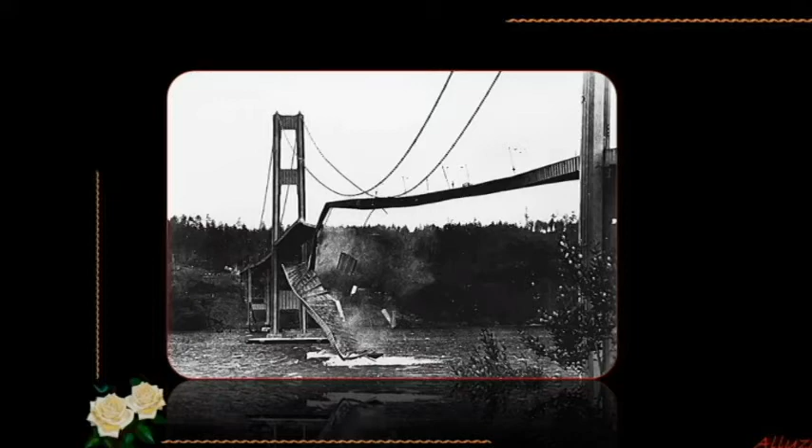Reasons for structures to collapse are bad design, faulty construction, foundation failure, extraordinary loads, unexpected failure modes, or a combination of causes. But failures also occur due to natural disasters such as earthquakes, floods, hurricanes, cyclones, and fires.

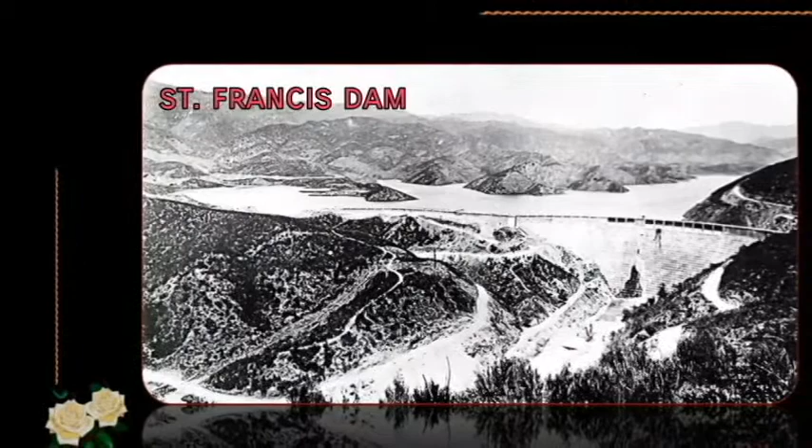The St. Francis Dam was a curved concrete gravity dam, built to create a large regulating and storage reservoir for the city of Los Angeles in California. The reservoir was an integral part of the city's Los Angeles Aqueduct water supply infrastructure. It was located in San Francisquito Canyon of the Sierra Pelona Mountains.

At 11:57 p.m. on March 12, 1928, the dam catastrophically failed, and the resulting flood killed at least 431 people. The collapse of the St. Francis Dam is considered to be one of the worst American civil engineering disasters of the 20th century, and remains the second greatest loss of life in California's history.

An investigation into the disaster concluded that it had been caused primarily by the unsuitability of the San Francisquito rock for supporting a dam and a reservoir.

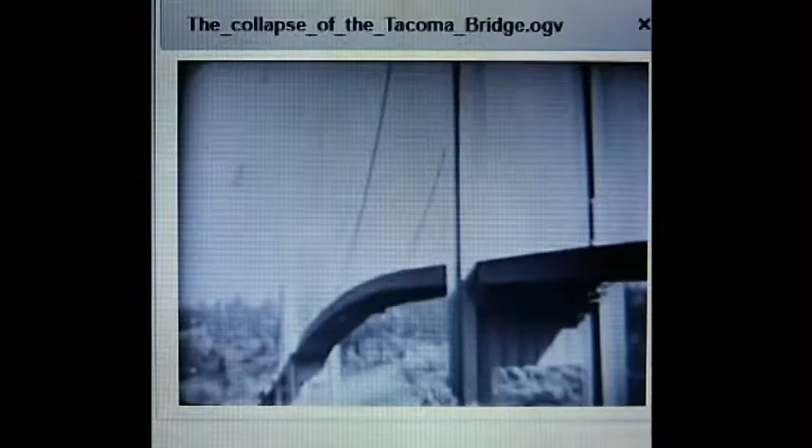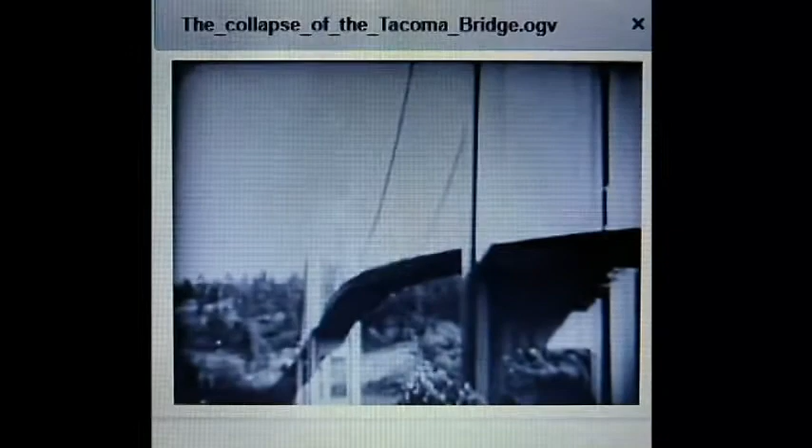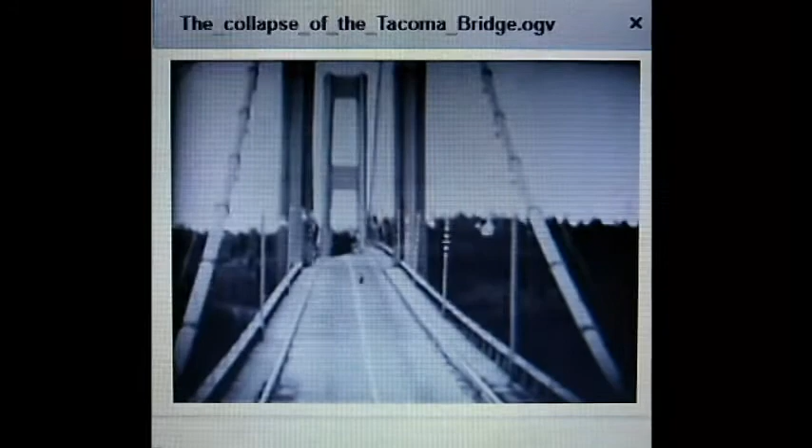The Tacoma Narrows Bridge in Washington collapsed only 4 months after opening for public use. The bridge spanned the nearly mile-wide Puget Sound, making it the third longest suspension bridge in the world, next to the Golden Gate Bridge and the George Washington Bridge.

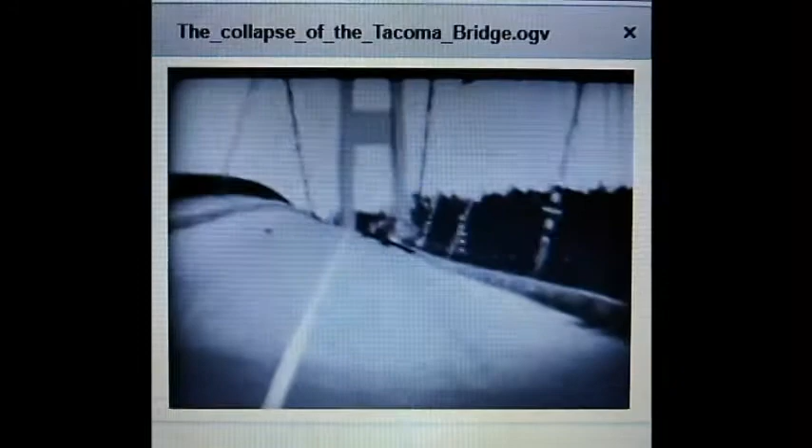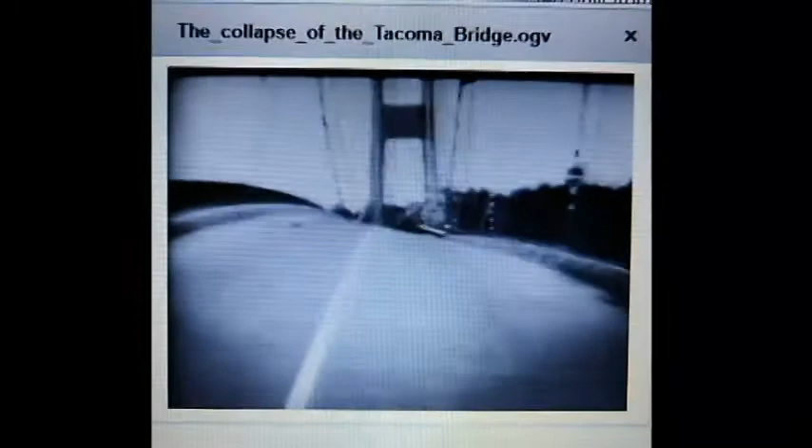While the original designer intended to create greater stability with a more standard design, the cost was unreasonably high. Instead, a cheaper option using plate girders gained approval. The girders, though, were only 1/3 the height of the originally proposed trusses, which resulted in a disproportionate depth-to-width ratio. As a result, the bridge was extremely flexible and vulnerable to high-speed winds.

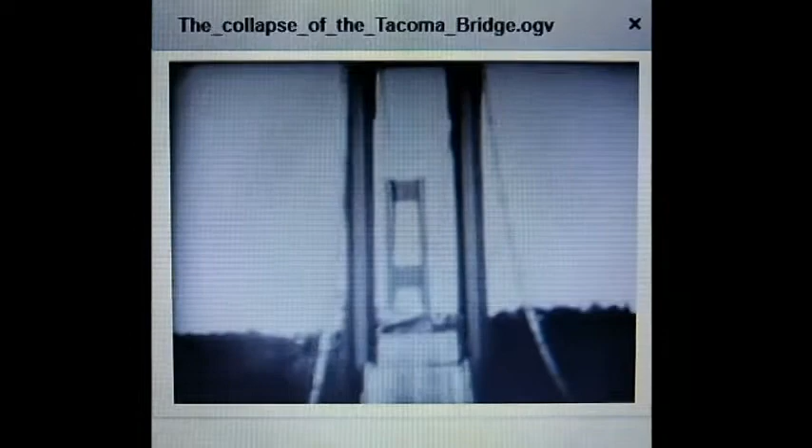On the morning of November 7, 1940, a 40 mile per hour wind struck the Tacoma Narrows Bridge, causing the bridge to twist and buck wildly. The bridge finally gave way, snapping the support cables and dropping into the river below.

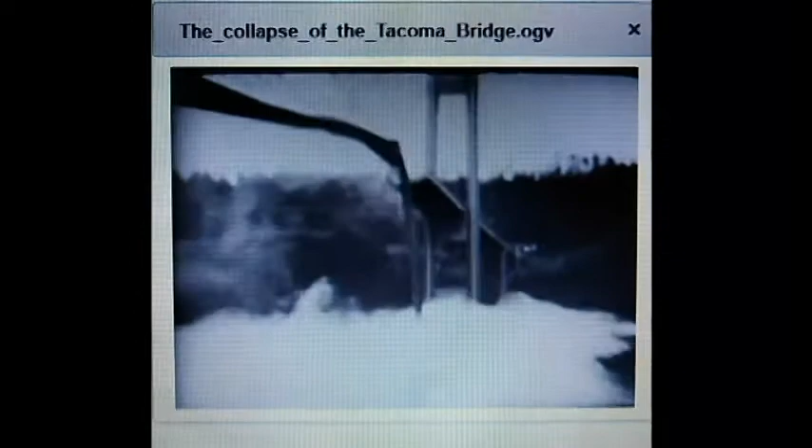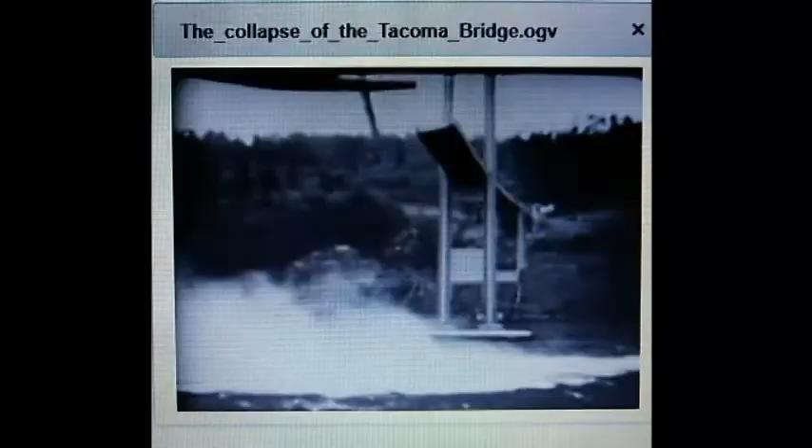The building was a much-anticipated landmark designed by a well-respected architect, but was known in the 1970s for its engineering flaws as well as for its architectural achievement. The opening of the building was delayed from 1971 to 1976, and the total cost is rumored to have increased from $75 million to $175 million. It was an embarrassment for the firm, for modernist architects, and for the architecture industry.

There were problems with the innovative use of blue reflective glass in a steel tower. Entire 4 feet by 11 feet window panes detached from the building and crashed to the sidewalk hundreds of feet below. Police closed off surrounding streets whenever winds reached 45 miles per hour.

The research raised questions about the structural integrity of the entire building, and an independent laboratory eventually confirmed that the failure of the glass was due to oscillations and repeated thermal stresses caused by the expansion and contraction of the air. The resilient bonding between the inner glass reflective material and outer glass was so stiff that it was transmitting the force to the outer glass, thus causing the glass to fail.

In October 1973, I.M. Pei and partners announced that all 10,344 window panes would each be replaced by single-paned, heat-treated panels. It took many months to diagnose and repair the building. Sheets of plywood replaced many of the missing glass windows of the building, earning it the nickname Plywood Palace and Plywood Ranch. Bostonians joked that the Hancock Tower was the world's tallest plywood building.

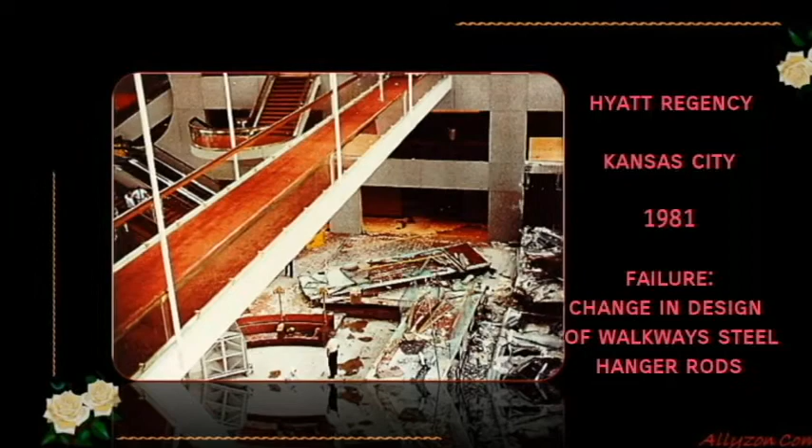This disaster contributed many lessons to the study of engineering ethics and errors, and to emergency management. The event remains the deadliest non-deliberate structural failure in American history, and it was the deadliest structural collapse in the United States at that time.

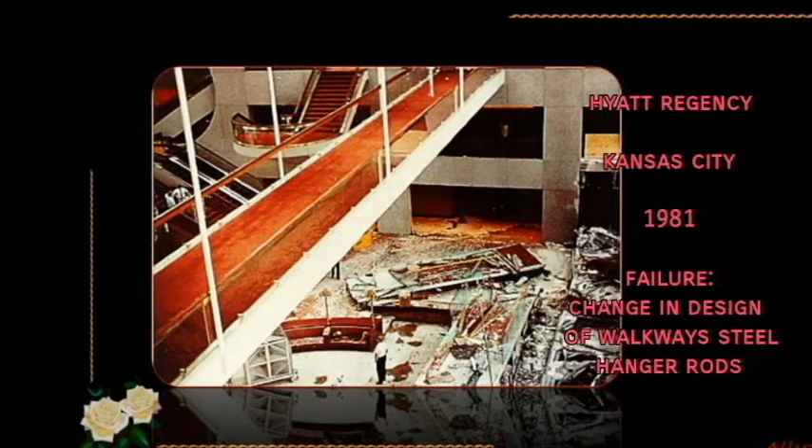The Kansas City Star hired architectural engineer Wayne G. Lischer to investigate the collapse, and discovered a significant change to the original design of the walkways. The NBS's final report cited structural overload resulting from design flaws, where the walkways had only minimal capacity to resist their own weight.

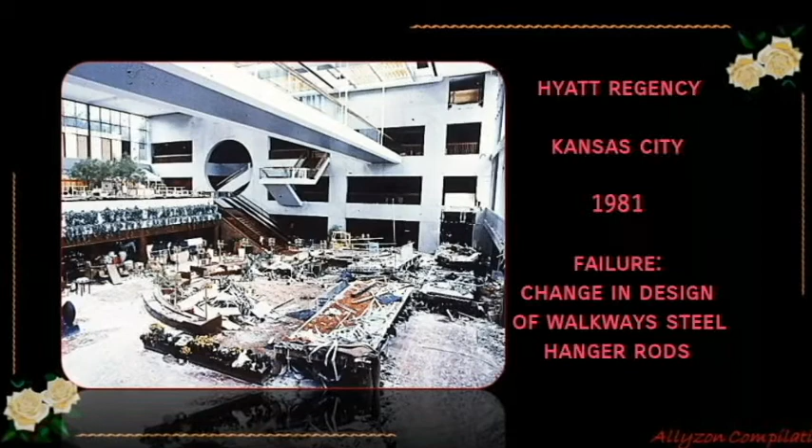Investigators found that the collapse was the result of changes to the design of the walkway's steel hanger rods. The two walkways were suspended from a set of 1.25-inch diameter steel hanger rods. This design change would prove to be fatal.

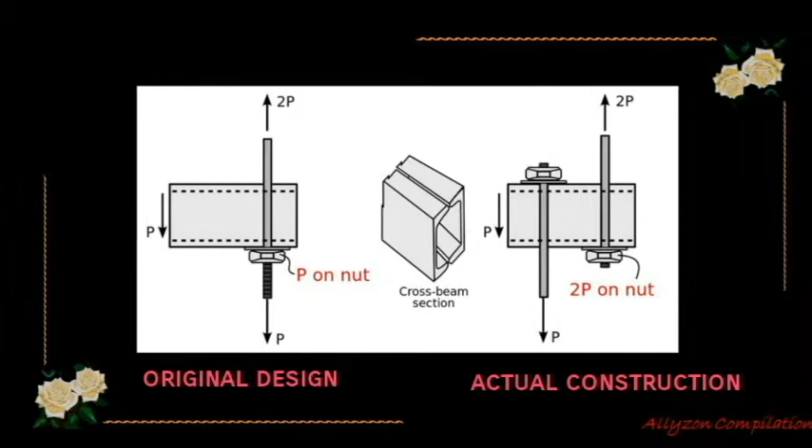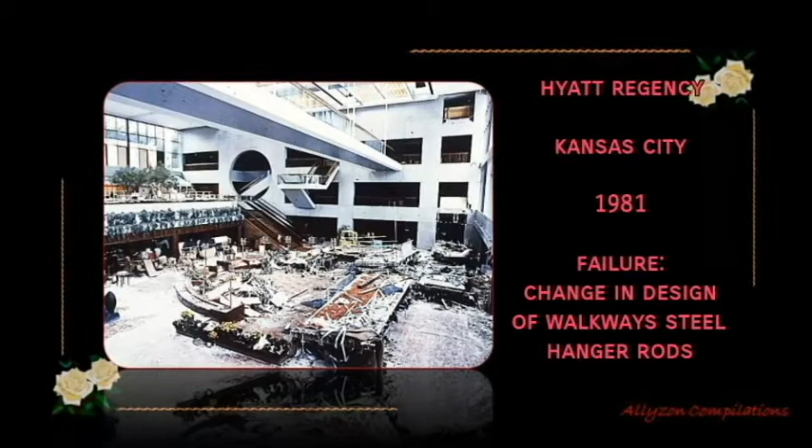In the original design, the beams of the fourth-floor walkway had to support only the weight of the fourth-floor walkway, with the weight of the second-floor walkway supported completely by the rods. In the revised design, however, the fourth-floor beams supported both the fourth and second-floor walkways, but were only strong enough for 30% of that load.

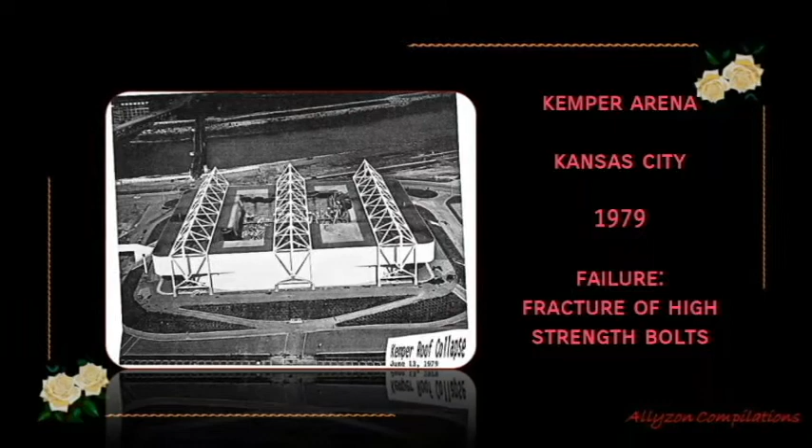On June 4, 1979, in the same facility that once hosted the Republican National Convention, Kemper Arena's roof collapsed during a rainstorm with 70 mile per hour winds and heavy rains. A supervisor had observed water pouring in and the scoreboard falling. Finally, a large area of the roof collapsed onto an unoccupied seating area. Since the arena was not in use at the time, no one was injured.

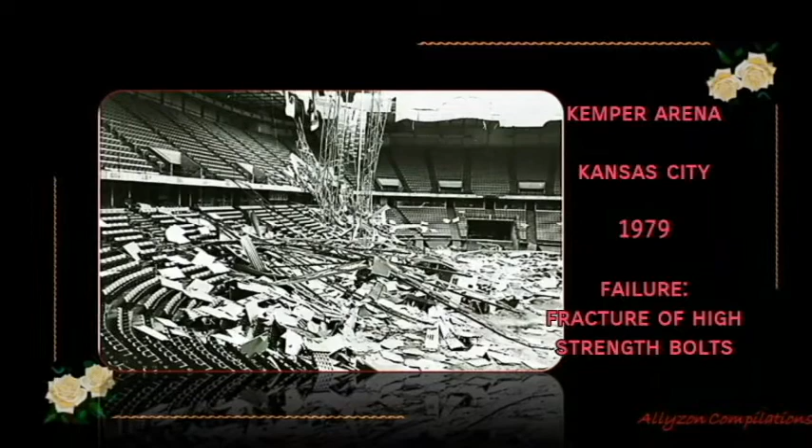After investigation, it was found that the collapse was triggered by fracture of the high-strength bolts, part of the hanger that suspended the roof from the space frames. Analysis demonstrated that failure of just one of 4 bolts per hanger resulted in a large prying load on the 3 remaining bolts that caused the collapse.

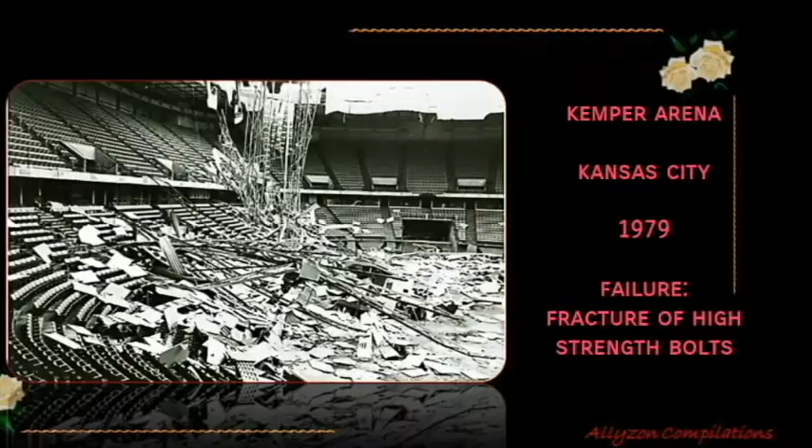During the 20 Fenchurch Street construction, it was discovered that for a period of up to 2 hours each day, if the sun shines directly onto the building, it acts as a concave mirror and focuses light onto the streets to the south. Spot temperature readings at street level including up to 91 degrees Celsius and 117 degrees Celsius were observed during summer in 2013, when the reflection of a beam of light up to 6 times brighter than direct sunlight shining onto the streets damaged parked vehicles.

Temperatures in direct line with the reflection became so intense that City AM reporter Jim Waterson managed to fry an egg in a pan set out on the ground. The reflection also burned or scorched the doormat of a shop in the affected area.

The media responded by dubbing the building the walkie-talkie building for its design and skyscraper shape. The building won the Carbuncle Cup in 2015, awarded by Building Design magazine to the worst new building in the UK during the previous year. The building eventually had to install screens at certain points to prevent the reflection of direct sunlight.

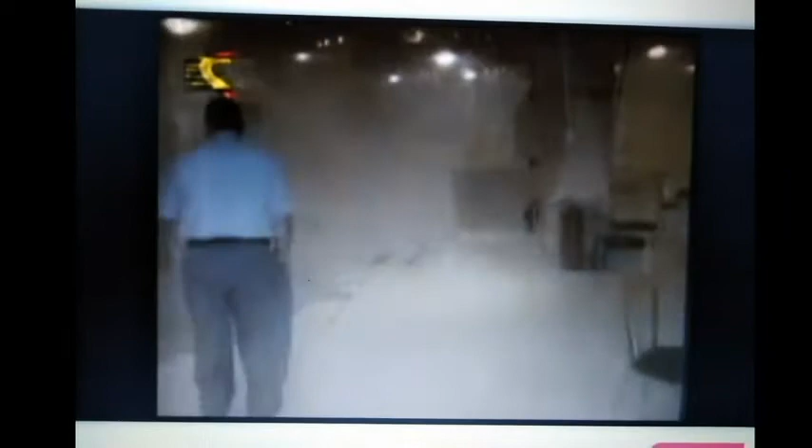During the wedding of Karen and Asaf Dror in May 24, 2001, a large portion of the third floor of Jerusalem's 4-story Versailles wedding hall collapsed. As a result, 23 people fell to their deaths and 380 were injured, including the bride who suffered serious pelvic injuries that required surgery. The disaster shocked the Israeli public not only because it was one of the worst building disasters in the country's history, but because the event was documented on a camcorder and broadcast on local and international television.

An investigation of the event concluded that it was not caused by a terrorist attack as suspected. Witnesses reported seeing a dangerous sag in the floor moments before the collapse. Initially, the side of the building that failed was designed to be a 2-story structure, while the other side was designed to be 3 stories. Late in the construction process, it was decided that both sides of the building should be equal heights, and a 3rd story was added to the shorter side.

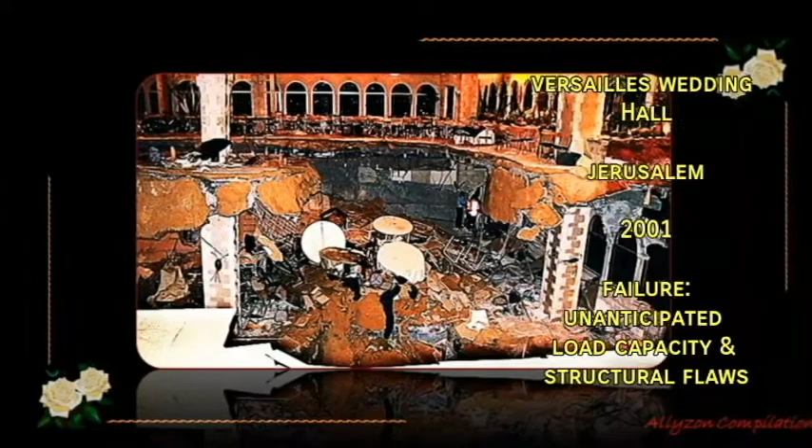However, the live load due to occupancy is typically much greater than the design load for a roof. As a result, the structure supporting the new 3rd story was subjected to much greater loading than originally anticipated. The effect of this error was somewhat mitigated by the construction of partitions on the floor below, which helped redistribute the excess load well, such that no damage was incurred. During the wedding event, this significantly overstressed floor section failed, resulting in a catastrophe.

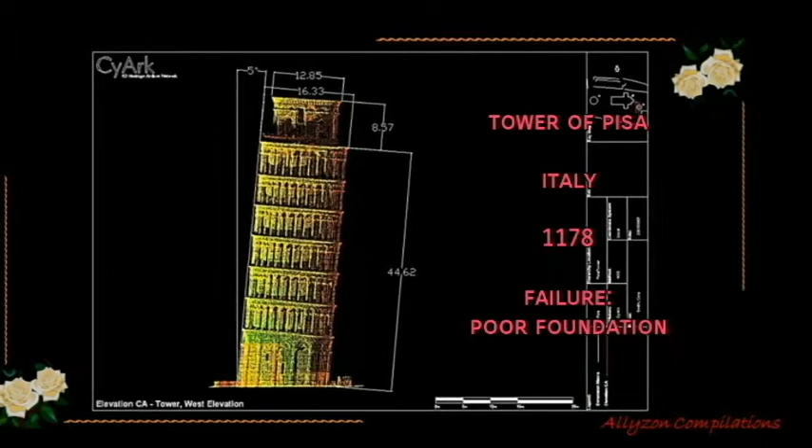The Tower of Pisa began to lean during construction in the 12th century, due to soft ground which could not properly support the structure's weight, and it worsened through the completion of construction in the 14th century. By 1990, the tilt had reached 5 and a half degrees. The structure was stabilized by remedial work between 1993 and 2001, which reduced the tilt to 3.97 degrees.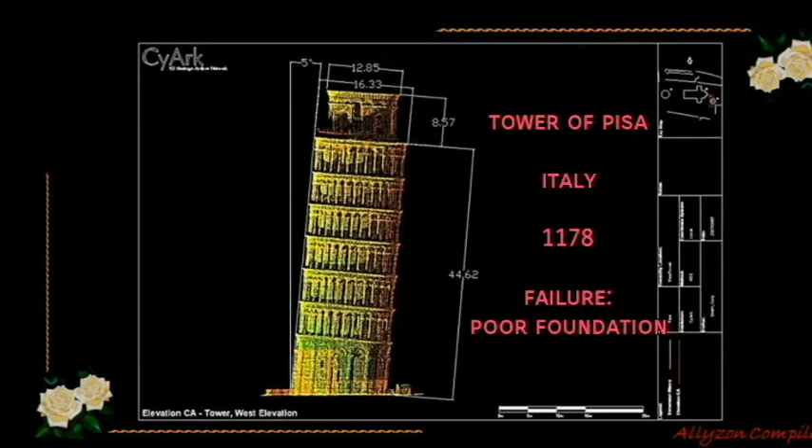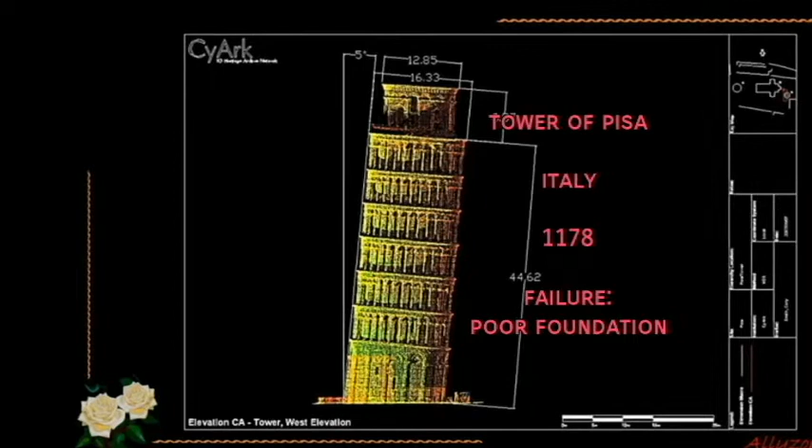Numerous efforts have been made to restore the tower to a vertical orientation, or at least keep it from falling over. Most of these efforts failed, and some worsened the tilt. On the 27th of February 1964, the government of Italy requested aid in preventing the tower from toppling. It was considered important to retain the current tilt, due to the role that this element played in promoting the tourism industry of Pisa. Starting in 1993, 870 tons of lead counterweights were added, which straightened the tower slightly.

At least 4 strong earthquakes hit the region since the year 1280, but the apparently vulnerable tower survived. The reason was not understood until a research group of 16 engineers investigated. The researchers concluded that the tower was able to withstand the tremors because of dynamic soil-structure interaction. The same soft soil that caused the leaning and brought the tower to the verge of collapse helped it survive.

In 1987, the tower was declared a UNESCO World Heritage Site. The tower has also been called one of the 7 wonders of the medieval world.